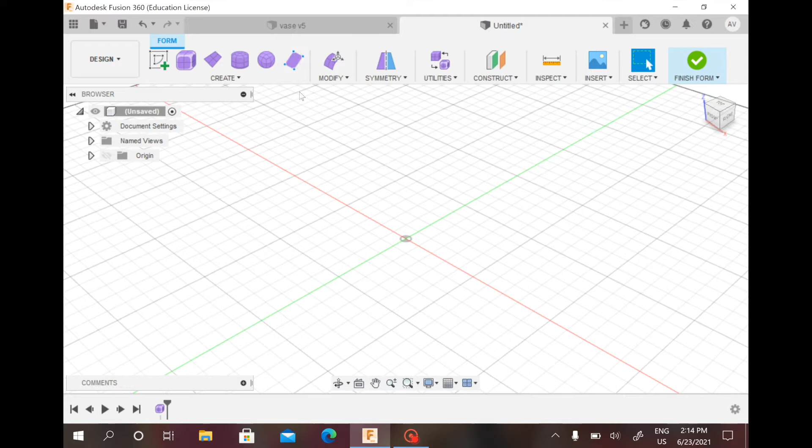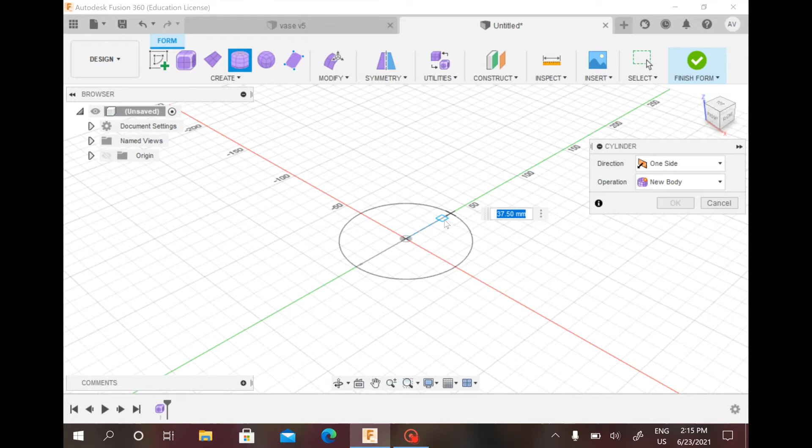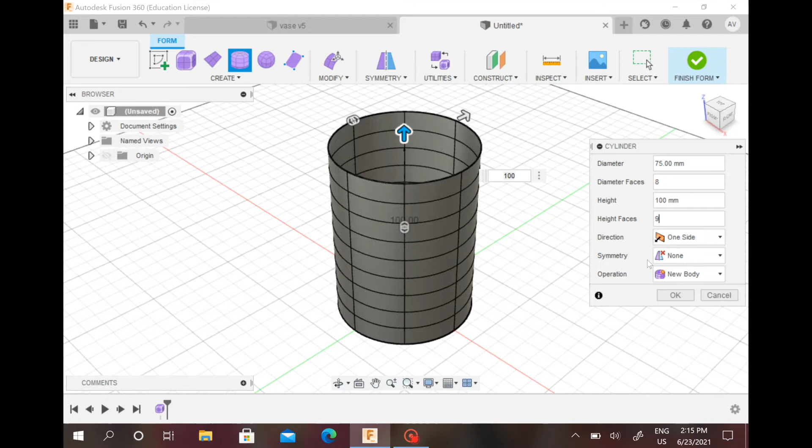Once you're there, go to create, then create cylinder, and choose the plane between the green and red lines. Once you've clicked, make sure the diameter is 75 millimeters, and the height - it might be different, but for my default it says 37.5 - change that to 100. Then change the height faces to 9. This should all be default, but if it's not: direction one side, symmetry none, and operation new body. Once that's good, you can press OK.

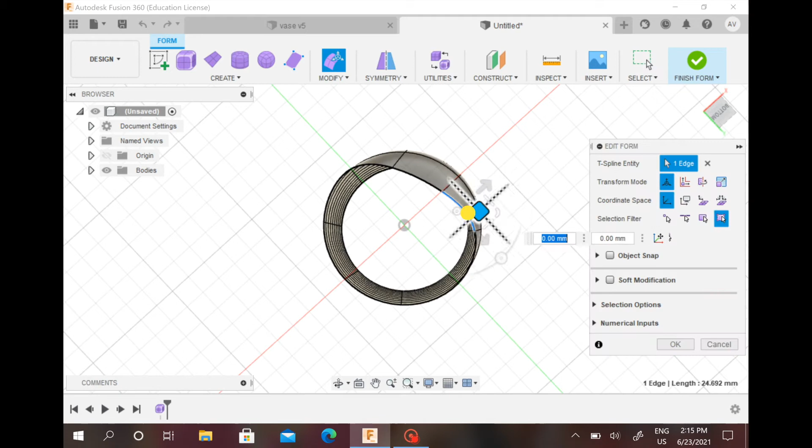Now we're going to go down to the bottom and drag these edges in toward the origin. Click one edge, select edit form, then drag it in using this square in the middle. Do that for every single edge. I'll be back when I have all the edges done.

Once you're done, it should form a shape like a circle, square, or something that doesn't look weird. Once you're done with that, you can use the orbit tool to go back up.

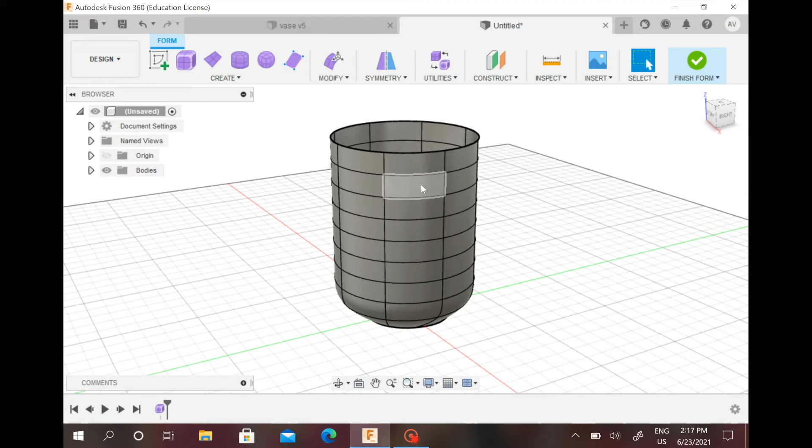Now I want you to see this top layer - go one down and just be aligned with either this red or green line. So not the top layer, but one below it. Highlight the next 3 and the ones next to it, so a total of 6. Right click and click edit form, and we're going to push it in by 10 millimeters.

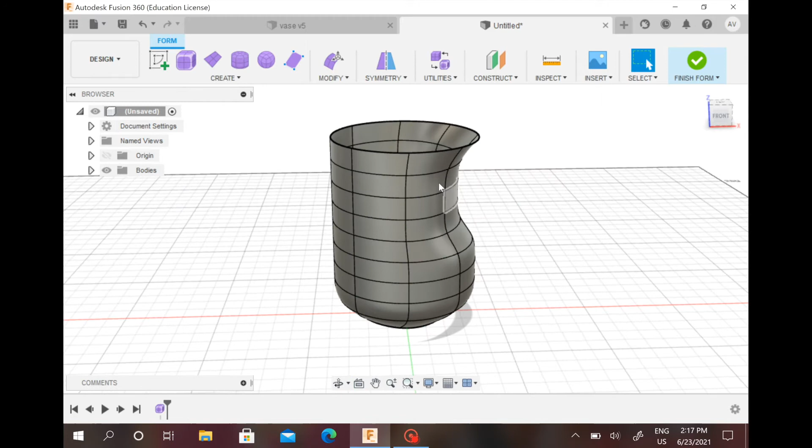We're going to do that one more time. So not the top layer, but the one below it. Highlight 6 next to each other, right click edit form, then drag it in by 10.

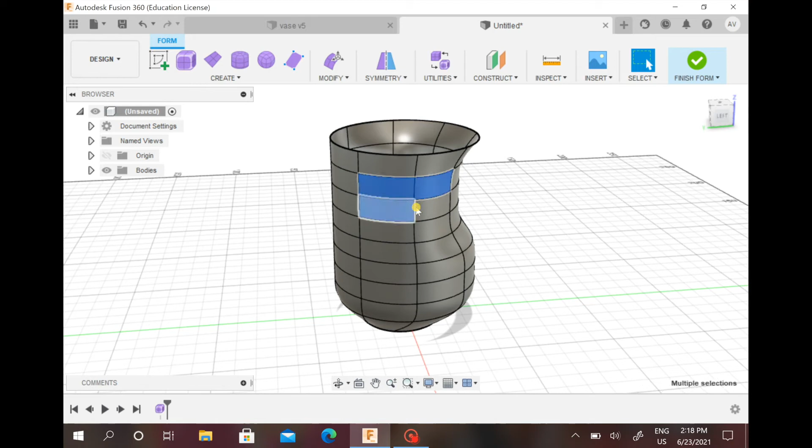We're going to do that for all 4 sides. And this is the last side. Also make sure you don't hit any of the lines or vertices right here.

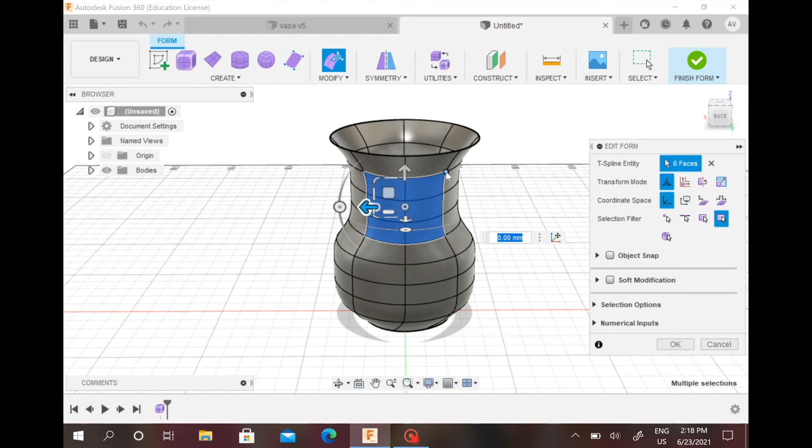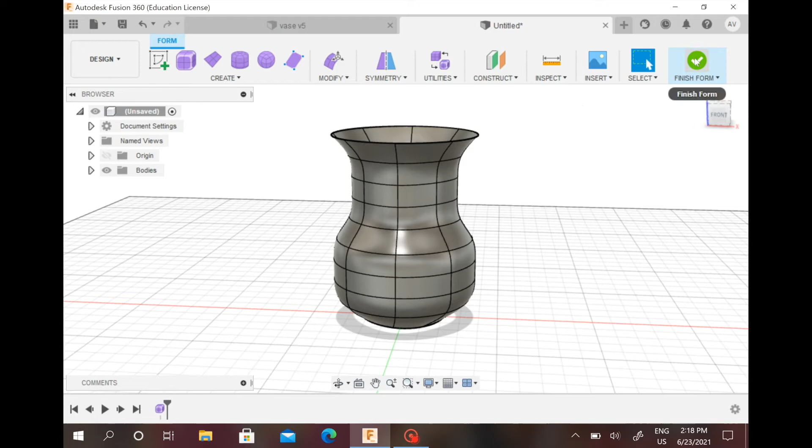Once that's done, you should turn all the way around and it should look something like this. So now we finally have the vase shape. You can always go back if you missed something. Now, since we're done, we can click finish form.

So now, if we were to 3D print this, it would not 3D print because it has no thickness. So we're going to go under create and choose thicken, click the inside, like the yellow, and then say 5 millimeters.

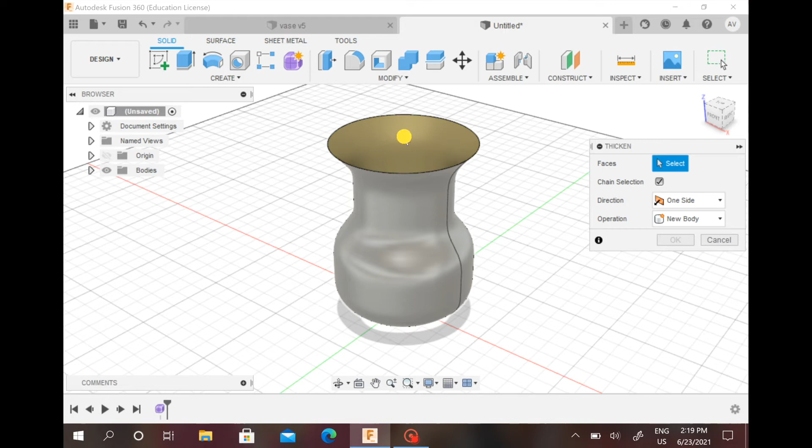Thickness 5, direction one side. If you want it to be symmetric, you can do 2.5 millimeters and that will be the same thing, but I'm doing one side and that will be 5. Then you can press OK.

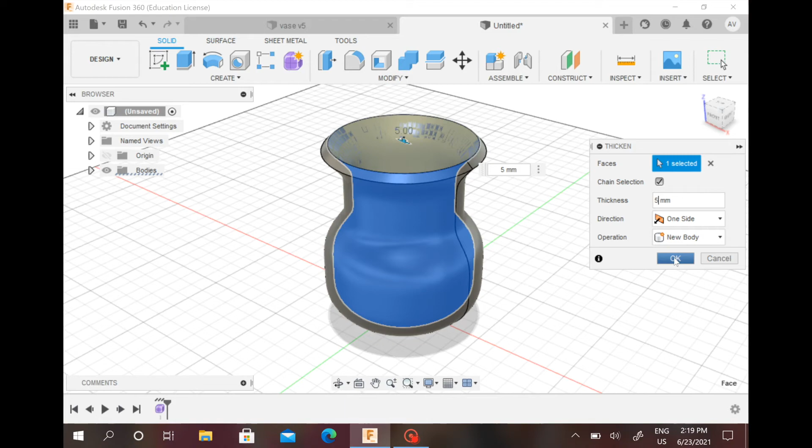So now it looks like that. So now, a vase usually has a solid bottom, and we have a hole here.

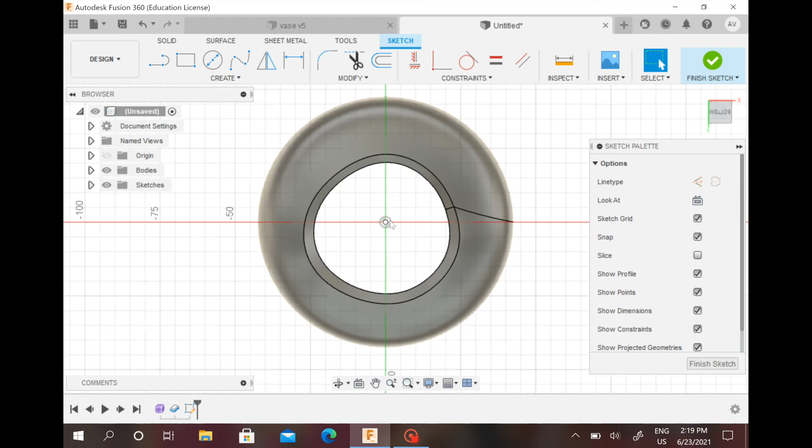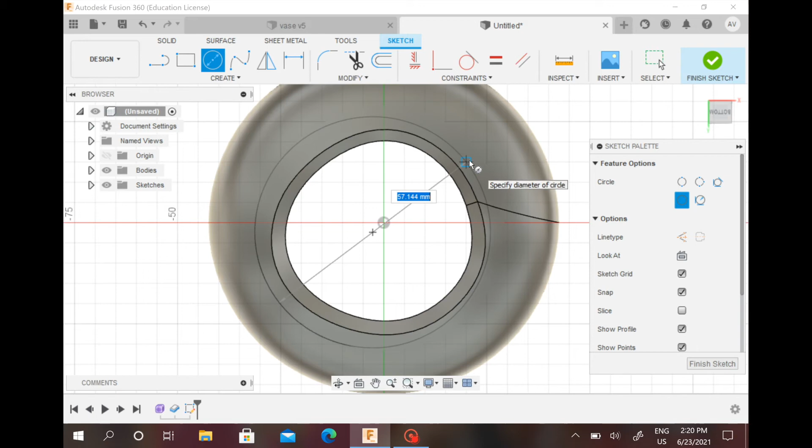So we're going to click create sketch and choose this bottom plane. And we are going to trace using the spline, this outer circle. Or if you want, you can use the center diameter circle and do something like that. The thing about the center diameter is you have to get a good starting middle point. Or you can trace it, like this.

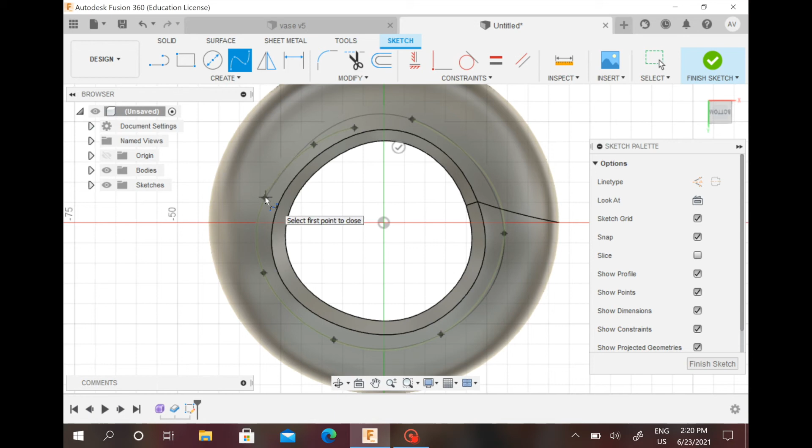So if that looks good, if it makes a complete circle or square or whatever your shape is down here, you can click finish sketch.

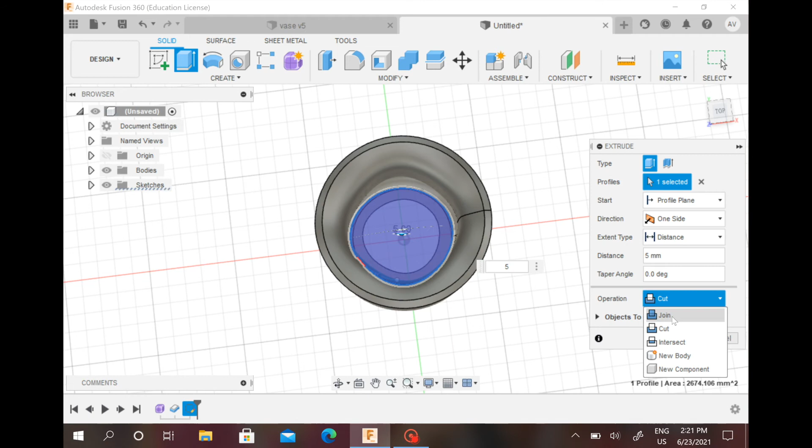And now we're going to go up to the top and extrude this by 5 millimeters. I'll probably do operation cut and change that to join. Once that's done, you can press OK.

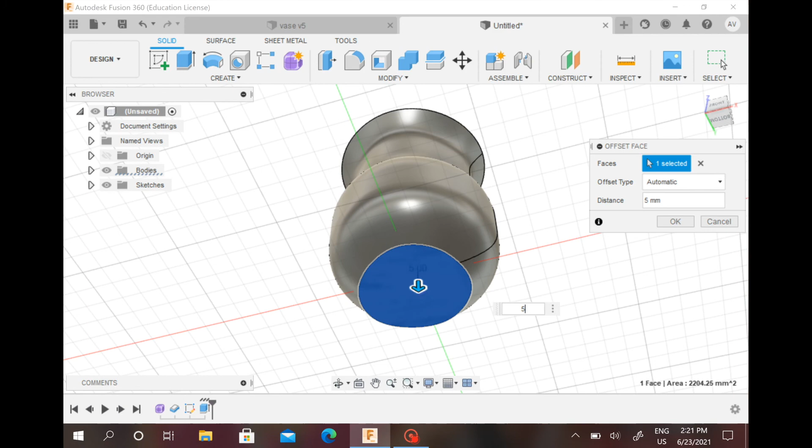So now we have one more step. If this looks uneven to you, you can press press pull so it looks even. It might be a very small number, and it's better to zoom in to get the exact amount.

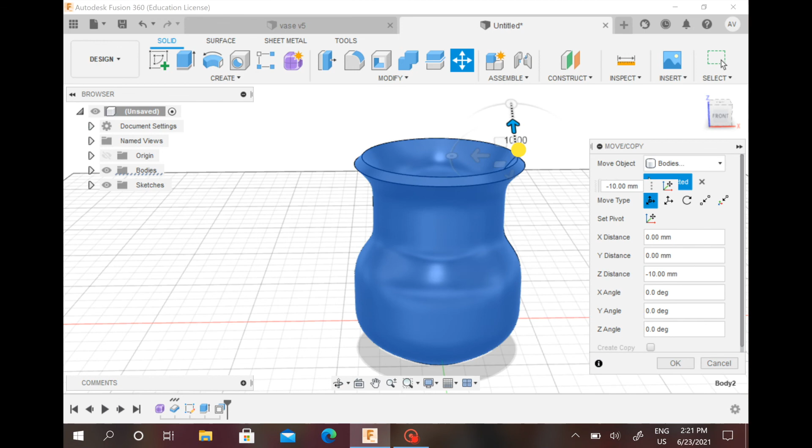Once that's good, it should be nearly flat. And if it's not on the plane, you can use move or copy and move this body up or down, or wherever you need to move it.

So that is it, and now we have finished making this vase. This is a very quick video.